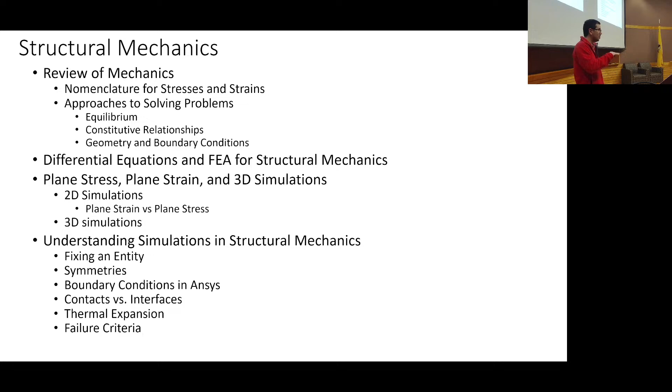We'll discuss some blasts from the past - mechanics, materials, plane stress, plane strain - and how we think about these simulations, or simulations of these types of setups. Then we'll get into some Ansys examples and do some of the same things we did in mechanics and materials using PrePoMax and CalculiX, doing them in Ansys. That will be a springboard to dive into the assignment, which includes the diving board. Okay, so here we go.

We really care about internal stresses, internal traction vectors, internal loads, and we can become like those engineers that think about invisible things. Usually in mechanical engineering, we have more affinity for tangible systems—they break, you get in trouble, it seems obvious in retrospect. But in reality, it's because we may have unanticipated circumstances, or a fault, or just didn't understand what's happening inside the object. So inside the object of our analysis, we end up looking at these internal forces keeping things in equilibrium that might be acting on small areas. These delta forces, these small forces over small areas, are what we call traction vectors.

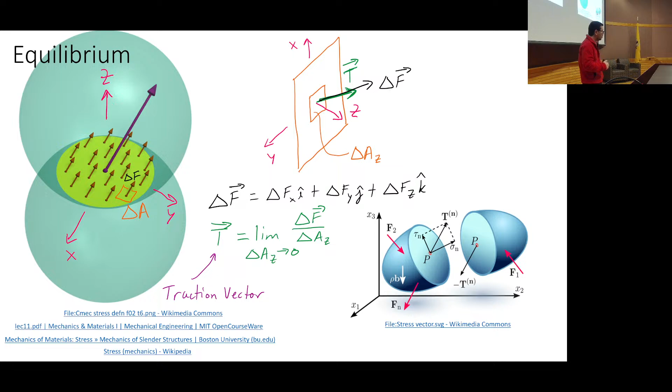And as we get into describing these traction vectors, we can think of the coefficients on the direction vectors for the traction vectors as our lovely stresses.

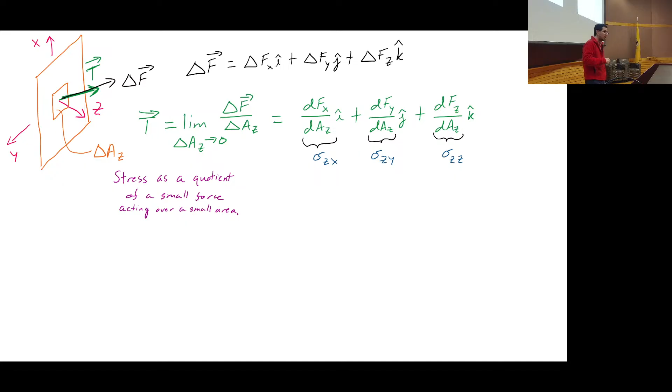So here you go. We define these stresses as being on a surface and in a direction. In this case, we were talking about a bunch of stresses on the z-face of this object—this plane is the z-plane—and we're looking at directions of stress in the x, y, z directions.

The convention, of course, we've already discussed because we've done some fluid mechanics, and in fluid mechanics often we're very concerned about what's happening with shear. We're also concerned about what happens hydrostatically with pressures, but shear becomes more the thing we're considering. In mechanics we do both—we're thinking about normal stresses and shear stresses, thinking about the effective stress, what is that material seeing, and then comparing these loads, these stresses, to failure criteria that we might pursue to understand whether or not something is going to fail.

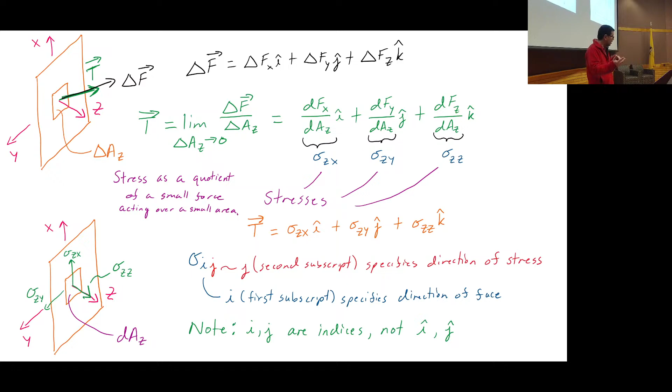Another aside: these stresses form a stress tensor. This is a 3D description of things. Do not say sigma ijk—that does not work, that does not make sense, because each one of these things is on a face given by an index in 3 directions, and then we have the second subscript, which gives us the direction the stress itself is acting in those 3 directions.

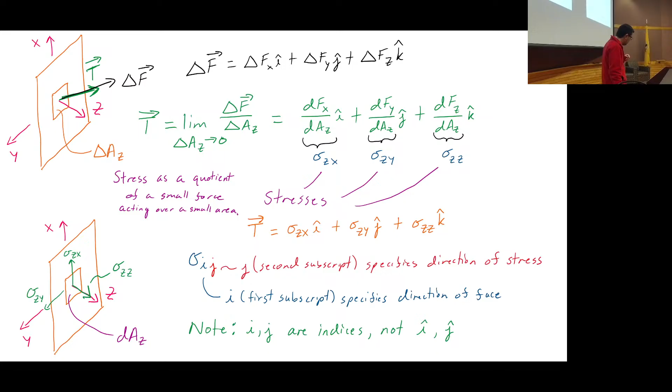Okay, so shear stress—we've talked about this before, and if we want to go back and do this more slowly, or just look at the slides which are available, you can get the idea that you have to satisfy equilibrium, otherwise these elements would start rotating or accelerating with angular acceleration. That would not be statics. And we also know that once you have one of these arrows of a shear stress drawn onto the element, then you can draw the other ones, because we satisfy both the moment and the force. Again, we're going through this quickly, it's just kind of review.

When you have 3D, you can make a nice little element, and this one only has the shear stresses depicted here. The normal stresses would be coming out of the faces of this cube.

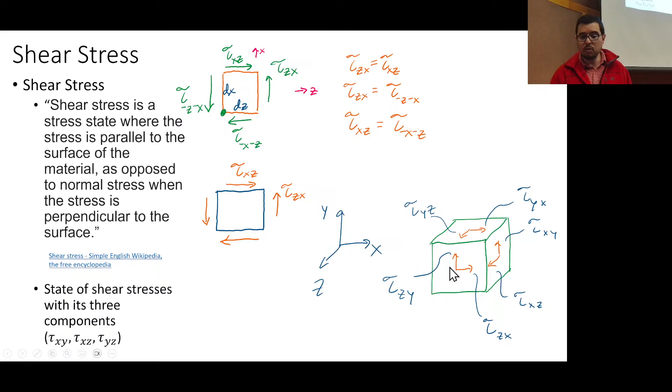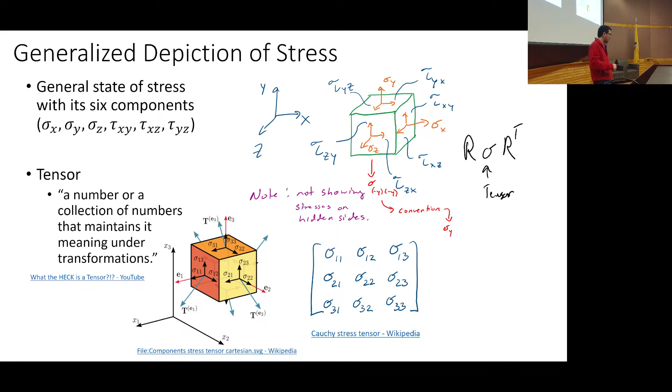We can also use tensors, and we can use the Cauchy nomenclature to describe them. You can also come up with ways of using rotation matrices to rotate these boxes in the state of stress about whichever coordinate direction we want, or combine them to have multiple rotations. Essentially, using rotations, you can describe the stress in a useful coordinate system, and figure out whether or not these would contribute to failure.

It's also, of course, the stresses do end up giving us an idea of how we can think of strains. So these strains then will extend—essentially integrate these strains and you'll be able to get the deflection or deformation of the object in question. Okay, so that's a very brief overview of things that we remember.

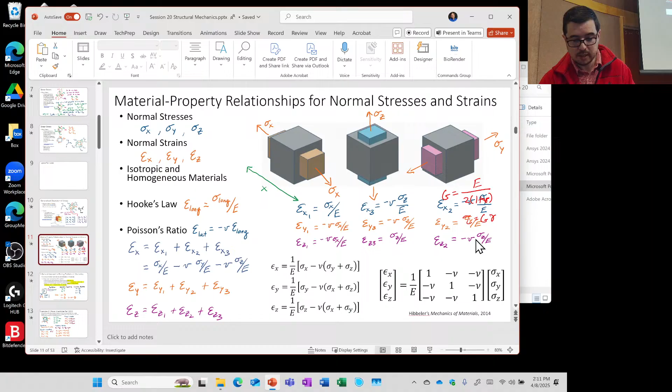I guess I have a couple things here that I can kind of—let's see, I don't know if I can subtract them or not. Let's see if we can. Yeah, why not, let's just get rid of these. Okay, and we'll go back to this. Okay, so what?

Now, question for you all: what are your favorite material properties for structure, for solids? What are your favorite material properties? Normal stress? Okay, that would be a quantity we are concerned about, all right.

My tendency is give me the normal stresses and I'm a happier person. But I'm asking about material properties. Elastic modulus? Okay, why do you like the elastic modulus? I feel like it's a pretty uncomplicated quantity—we got it, we lose it. Okay, all right, that's confidence. That's confidence, I like it.

Professor Singer has told his students you can think of many things as springs. I agree, you can think of many things as springs. The elastic modulus is a nice way to get an idea of what the stiffness would be, for the element at the element level, but also once you start building structures.

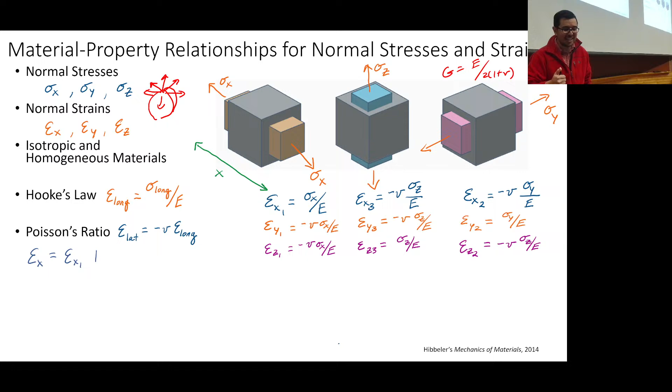The only thing I remember is ductile materials fail at 45 degrees. Ooh yes, in fact I'm with you. Okay, we're going to jump through this real quick. I'll come back to this.

Do you remember this? No? I got some no's, I don't remember this either. Normal stress, zero stress, normal. Zero stress, normal.

So then, if I take a perspective, in this case, if I use Mohr's circle, remember I have to draw the circle, and I can get tau max. Now this comes out, this is just Mohr's circle.

I jumped over the step where we did the slicing of the triangle. When we took an element, sliced it, and had the triangle, I forced you, if you were taking the class with me, to know how to do equilibrium on that triangle. If you did not do the equilibrium derivation on the exam, you didn't get full credit. Does anyone remember that? Okay, no. Good, I'm glad we haven't started.

So the point is that in the pressure vessel, just like what we were saying here, we have normal stress in this direction, but if you rotate the element 45 degrees, you can figure out what the shear stress components are. Because then the Mohr circle would tell us that maximum shear stress is going to be half of the normal stress that I've got.

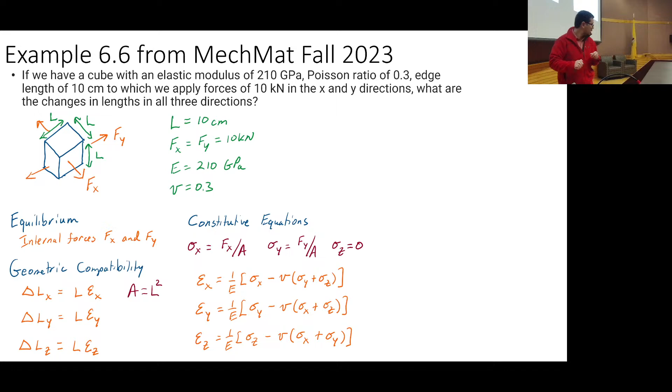We're going backwards, by the way. Okay, now, oops, now I'm going forwards. I should just use the keyboard. Okay, oh, now maybe you saw it, maybe you didn't.

Well, we're solving our problems in mechanics using statics. There were three pillars, three categories that we like draw two lines on a piece of paper, and there were three pillars. Do you remember what those three pillars are for solving a mechanics problem?

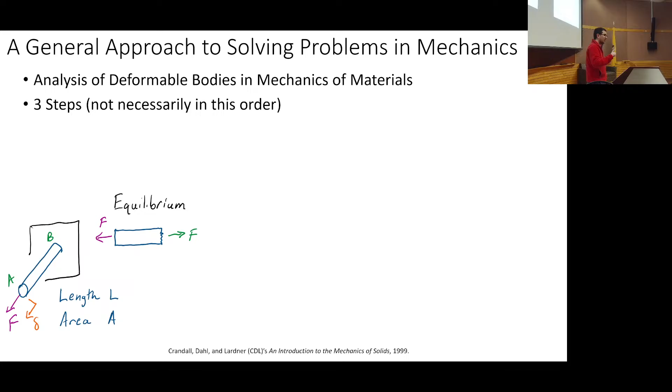One of them is there. It's written in letters already.

So equilibrium, right? We spent a whole semester doing statics. But what's the problem with only using statics to figure out stresses?

Yes, Rishi. So here everything is static, right? Like the moments? Moments, okay, momentum and moments are different. So yeah, you had to involve moments, but I'm going to say that the equilibrium that we're talking about...

Maybe I should change it, it's a study of forces and equilibrium requirements. Equilibrium does in fact include the moments. Okay.

So what else do we need in order to be able to calculate stresses and strains? Geometry. Yes. So we need a geometry, right?

So geometric compatibility. In particular, we need to know something about boundary conditions. And we sometimes need to say, okay, remember this displacement here is going to be equal to 0. This displacement is going to be equal not to 0. These displacements here and here, they're going to add up to equal to 0. Remember all of that? So that's all under geometric compatibility.

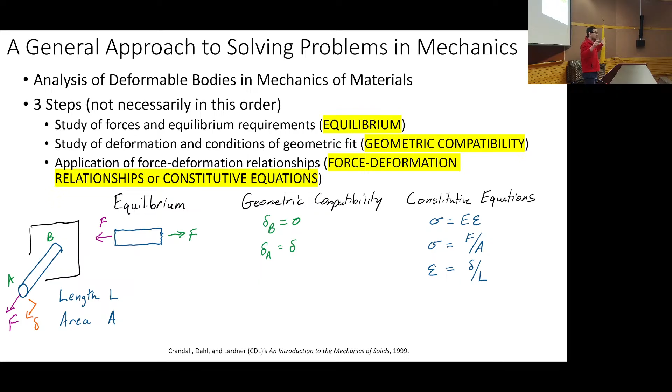But for those, especially for those indeterminate problems, right? Where it's like, hey, equilibrium only gives me a couple sets of equations, and I've got 3 unknowns. So how do I do it? I need additional equations. I need another equation. And so the constitutive equations and the geometric compatibility help us out.

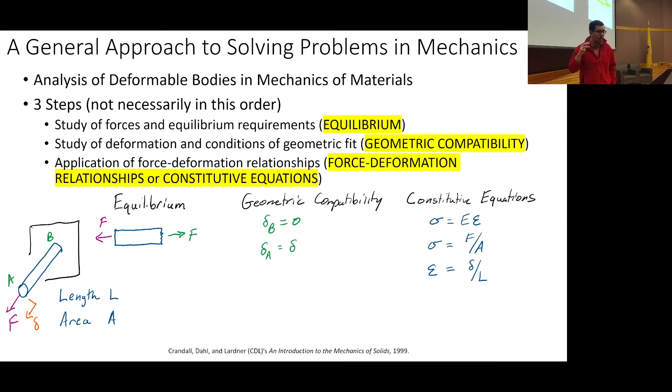Okay, so these are the 3 pillars: equilibrium, geometric compatibility, constitutive equations. If you look at the theory for, or some ways of describing the theory for finite element analysis, look at this. It's nasty. And again, this is an impressionist perspective. The 3 categories are equilibrium, geometric compatibility, and constitutive relationships.

So even when you, these are the differential equations, the PDEs that are being solved. But even when you set up your problem, now when you put it in simulation, you're kind of like, oh, I have to put some forces on this thing. Oh, that would be under equilibrium, or I put some moments, right? And I know that it's not going to deform, or I know it's not going to move.

All right, when I do this, or it can move. I mean, it's not going to accelerate. It's not going to, this thing has got to be fixed somewhere. We'll come back to that point in a little bit. I am going to be interested in what's happening with the geometry. Okay, that's great. I'm going to be putting boundary conditions. That's great, that's all geometry.

And then I'm going to be interested in calculating the strain and the stress. So then I've got my constitutive relationships. So we have kind of this idea that all these things are coupled together.

Now, are these equations as straightforward and simple as the heat equation? No. And that's maybe why you're like, well, why didn't we do this earlier?

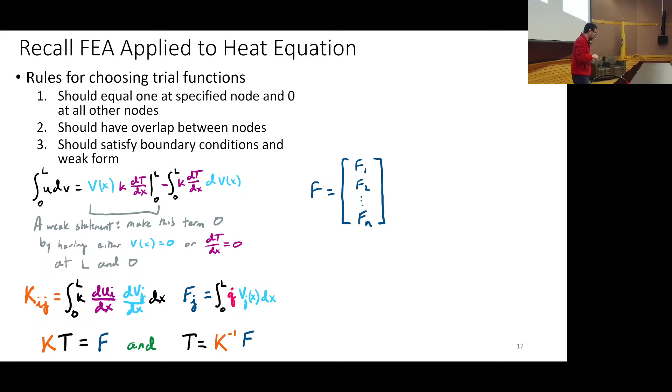And just like we described before, there are these test or trial functions, or basis functions, that we set up to gradually get us to the state of strain, the state of stress, and the state of deformation of this object.

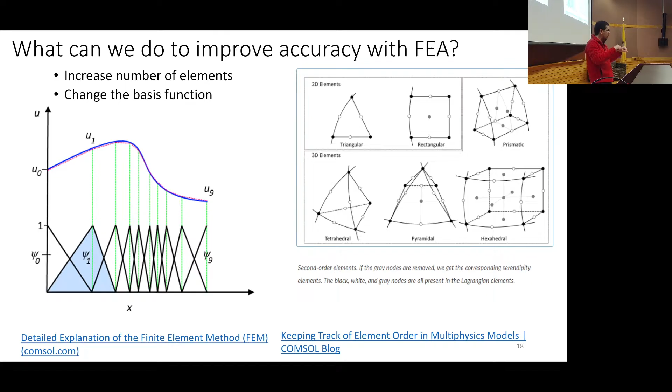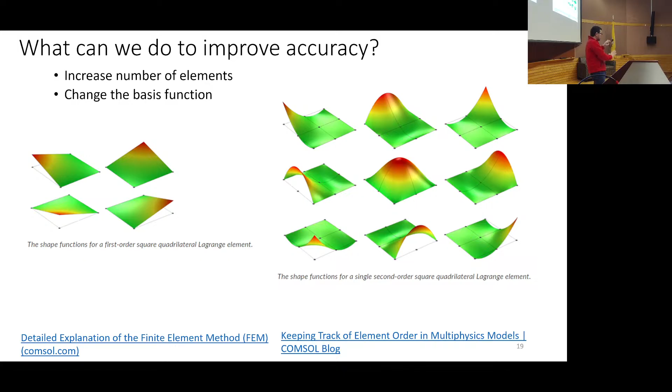And there are different types of elements that can be used. The more nodes you have, the more curvature an individual element could have. If it's just a triangle with 3 nodes on the corners, that element is going to be kind of planar, but its next door element can also be planar. So you can build this interesting shape, or set of shapes, with triangular elements. But you could add extra nodes to the sides of those triangles, and now you have these more interesting types of shapes, where there are nodes on multiple sides, so every element isn't just a linear gradient across it. Every element can have its own curvature and try to capture the detail more faithfully.

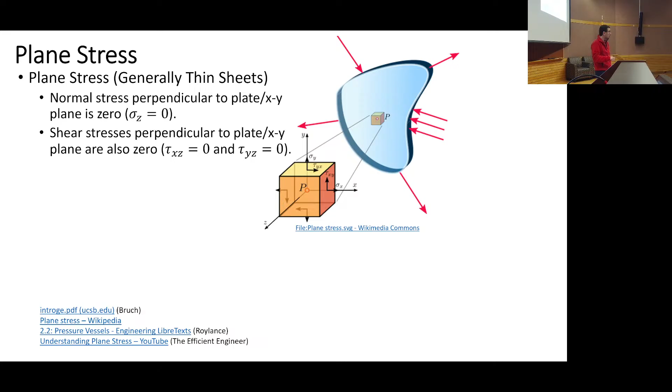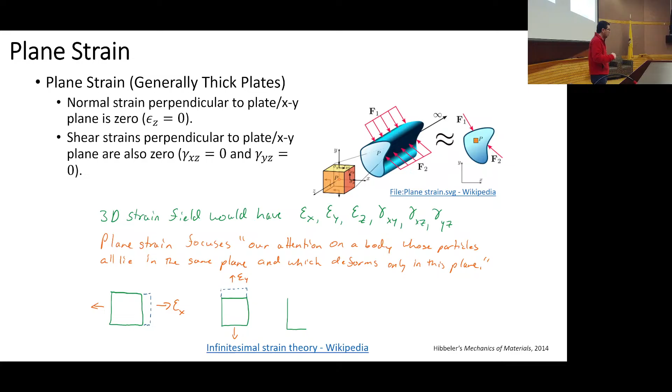Now, when we think about the objects we're going to simulate in finite element, we can think in terms of thin ones, which are states of what we would consider to be plane stress, or we can think of them in terms of thick ones, which is what we consider to be states of plane strain. And we can think of them in between as well. That's a very nice aspect of being able to do real geometry, a real 3D geometry: the world is not split into just very thick plates and very thin sheets, it's actually a combination of the two.

When we think about symmetries, we've discussed some symmetries in particle dynamics, in fluid, in heat. There's actually interesting symmetry in structural mechanics, which we don't use very often, but essentially, if I say this is a solid structure and I want to symmetrize it, you could say split it down the middle, and you can think of it as almost like having a frictionless boundary condition between the two as this slides up. This is something Professor Steve likes to emphasize, and I think it's a little abstract, but that's one additional way of applying symmetry to structural mechanics.

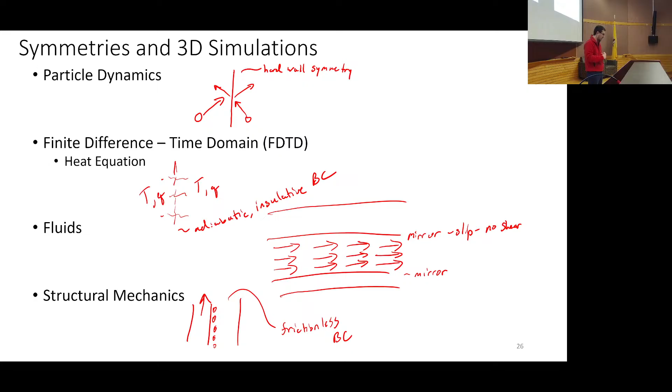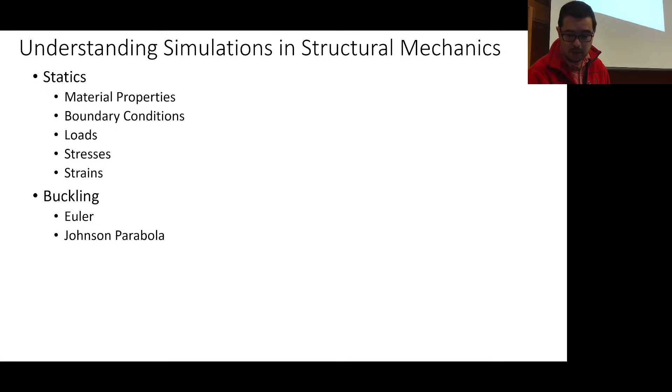Okay, so let's do some basic examples. We'll cover buckling next time, not today. Today we're going to focus more on static loading and also static thermal loading, and just show you how it's set up in Ansys.

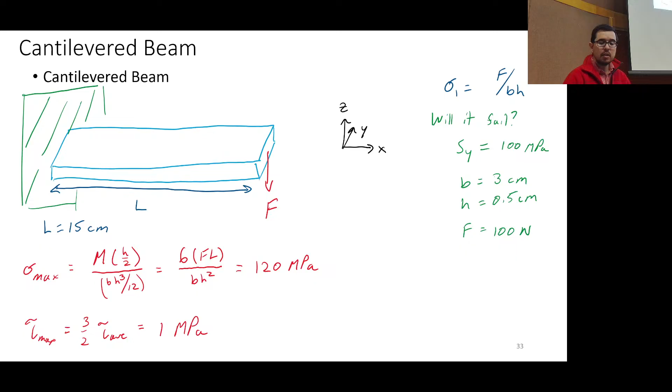So we're going to use, we talked about failure criterion already, a bar under tension, a cantilevered beam, and a bar under temperature, thermal expansion. This bar we're going to start with is kind of like a thin sheet. And while I'm talking, let's go ahead and bring up Workbench.

There we go, so it can load. We're going to have it have a thickness of just half a centimeter, so 5 millimeters, and a span across the top of 3 centimeters, and we're going to have it be 15 centimeters long.

We're going to apply a load normally, kind of pulling this thing apart, and be able to look at what the normal stresses are, and also the von Mises stresses, the equivalent stresses, and get some ideas and compare it to theory.

So to get started here, we're going to come down to static structural, and we put it in. And this time we can do a couple things. Let's start with the engineering data here.

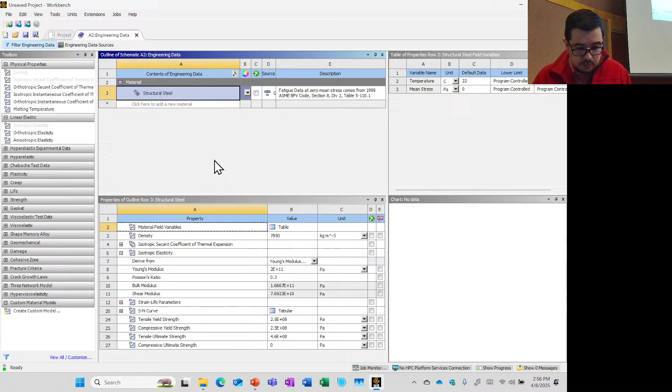So this is structural steel by default, but let's go ahead and call this generic steel as our material element. And you see as our material that we're going to be using, it's empty.

We talked about this a few minutes ago. What are some of the material properties, the basic material properties that we want to use to define our material for finite element? What kind of quantities, what kind of material properties should we drag in there?

Yeah, so elastic modulus would be a good one, right? So we can come over here to isotropic elasticity, and we can drag it over to this property thing, and boom. All right, now we called it steel.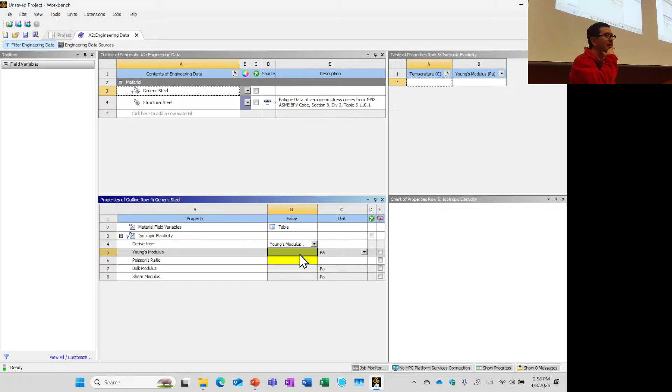So what do you want to put in for the elastic modulus? Anyone? Elastic modulus of steel? Sure, we can put in 210 if you want. 200, 210, sounds good. Your GPA depends on knowing this. All right, so 210 gigapascals.

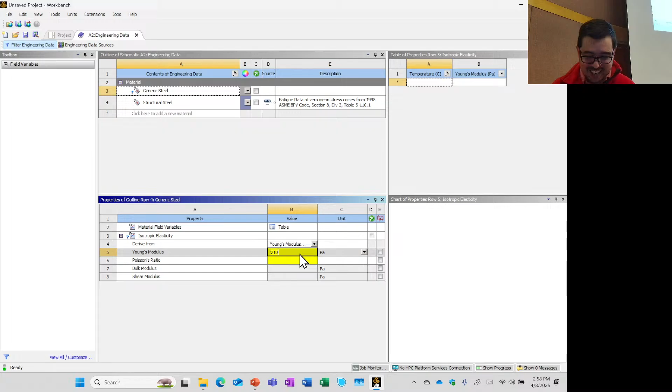So that's E to the 9. And Poisson's ratio, 0.3 is not bad. And it's already done some other calculations for us.

Here we can also put in a density, although we don't care that much, but the density for steel is... anyone? What's the density of steel?

No idea? Okay, what's the density of water? 1,000. Okay, is steel more dense or less dense than water? Good, all right, so now we have a lower limit, 1,000 being kilograms per meter cubed.

7,000, that's a good guess. I think the internet just told you the answer, right? So 7,850 kilograms per meter cubed.

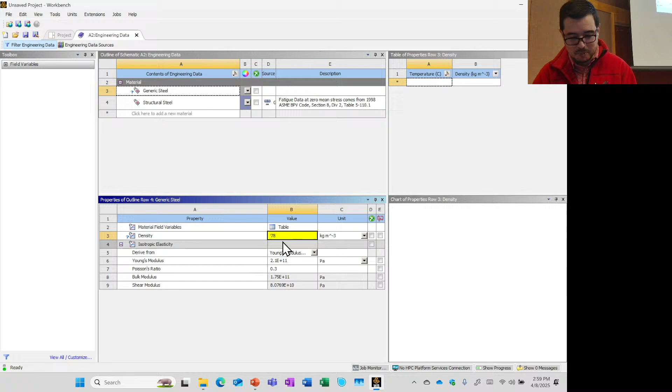Now, is aluminum less dense or more dense? How much? You don't know, that's okay, right? Well, is it okay? So aluminum is around 2,700 kilograms per meter cubed.

What are some of the most dense solids? What are their densities like? Lead, okay, so lead is pretty dense. That's going to be probably around 10,000 kilograms per meter cubed. Tungsten's also more dense, that's probably close to 18,000... 19,000.

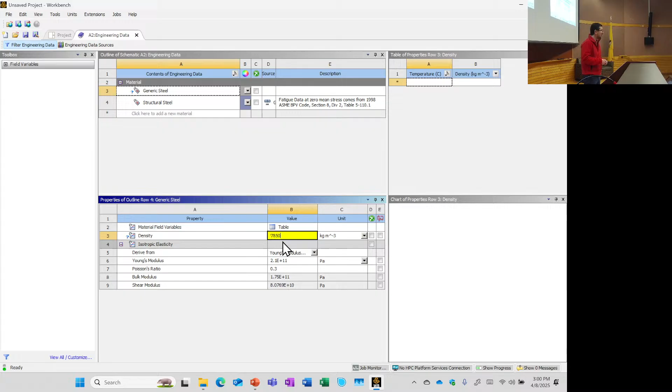Gold? You know, gold is like around 19 or 20,000 kilograms per meter cubed. Platinum, also pretty dense. Gold is a popular commodity right now if anyone's looking at what's going on in the world. But anyway, so yeah, those are just some general ideas. Plutonium, also pretty dense.

But yeah, we have our elastic moduli, and even though we don't think about density too much, it's pretty good to have an idea.

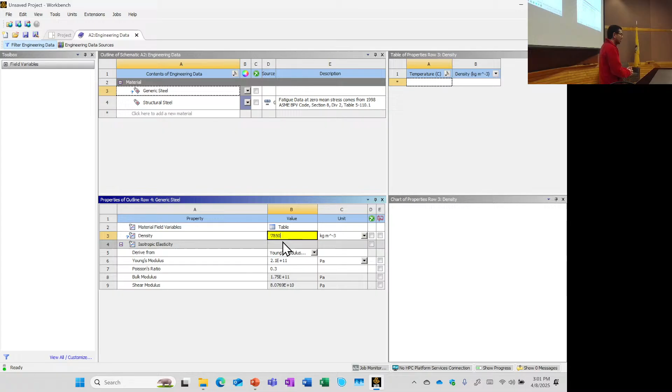I asked the other class this same question. If you go into the machine shop, actually you don't have to go into the machine shop, if someone hands you a sheet of metal and says, is this aluminum or steel, can you tell the difference just by holding it?

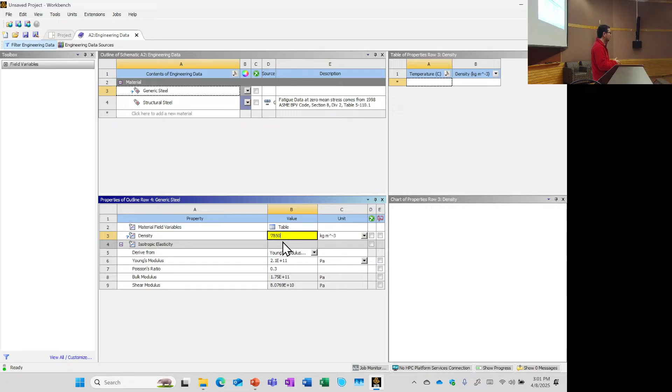You can. How can you tell the difference? Aluminum feels a little lighter. Yeah, it feels a whole lot lighter, right? And it's not because you took it and hit your head with it, although that's another way you can probably figure out which one is which too, if they're the same thickness, because the elastic modulus is going to be a third in the aluminum case of the steel. Anyway, okay, so we've got material properties.

Since we're going to do a thermal problem as well, let me see, where is it? We can also put in this... yeah, this is fine. We're going to put in the thermal expansion, okay.

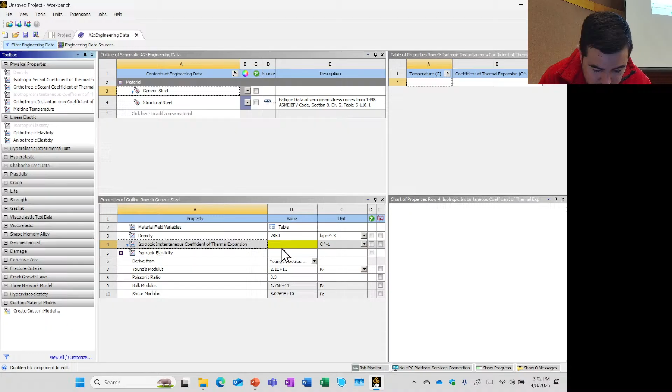And that's usually like 10 to the minus 6 or so, 10 times 10 to the minus 6, okay, or 12 times 10 to the minus 6. We're going to use 6 just because that's what I did before, so 6 times 10 to the minus 6. And of course, if I wanted the volumetric coefficient of thermal expansion, what is it going to be if it's 6 times 10 to the minus 6?

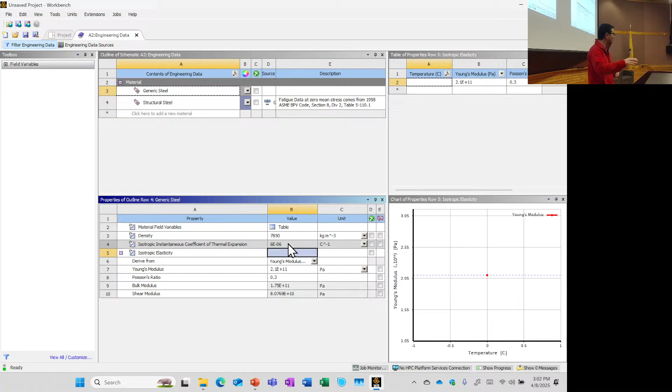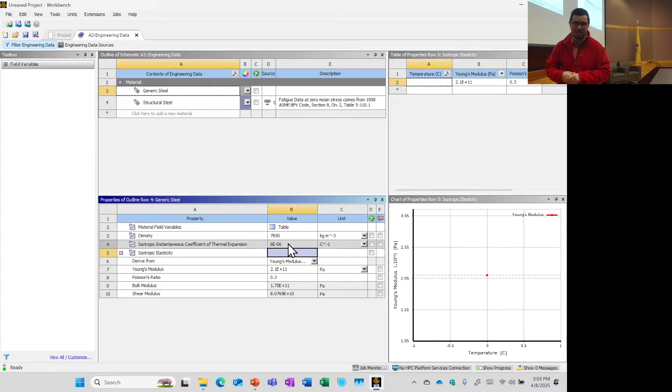Oh, here's a hint. Yes, right, factor of 3. Don't cube it, just multiply by 3. You can go ahead and look back at your mechanics of materials notes to figure that out.

So I think we've got our material properties set. Let's go ahead, we get to leave it in 3D. We're going to right click and do new SpaceClaim geometry, and we'll wait.

Did anyone have fun with Design Modeler? Takes more RAM, doesn't it? A little bit slower. I tried to get the airfoil thing to work in SpaceClaim, but I could not, I failed. So instead I followed what other people did in Design Modeler. But if you all have success with SpaceClaim and importing your airfoil geometries, feel free to post a video and I will like it for you. Maybe someone already has, right?

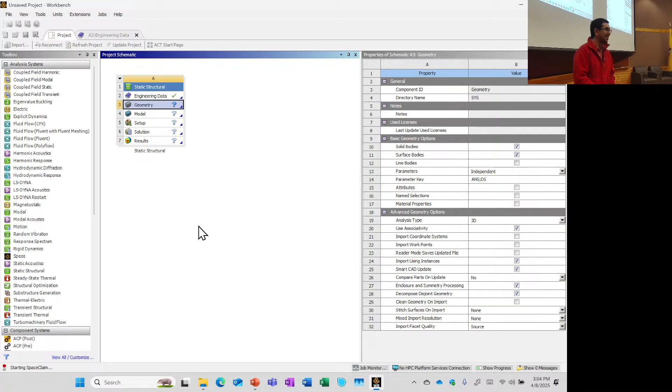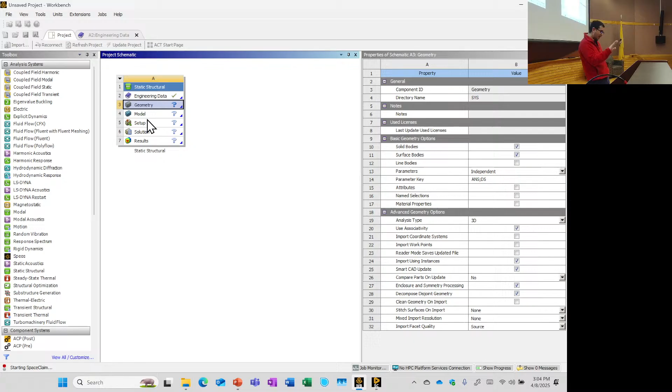Okay, so we're waiting for SpaceClaim to start up. What's nice in the static structural model, or this module, is that in the next step when we do the modeling, the results will appear in the same window. It's not like Fluent, well Fluent does that too. The results that we're interested in will appear in the same sub-software window that we do the meshing in, so we'll be able to do meshing and get the results at the same time.

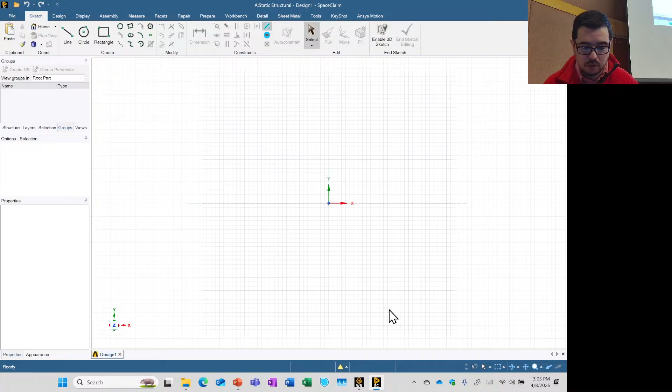Okay, so here we are waiting. All right, and we can go ahead and do the top-down view. In this case, if you want, you can change the units we're interested in using. So you could come over here to units, and we're in millimeters for now. That will be suitable for the geometry, because it's not crazy: 15 centimeters, so that's 150 millimeters this way, and 3 centimeters this way, or 30 millimeters, and then it's got a thickness of 5 millimeters.

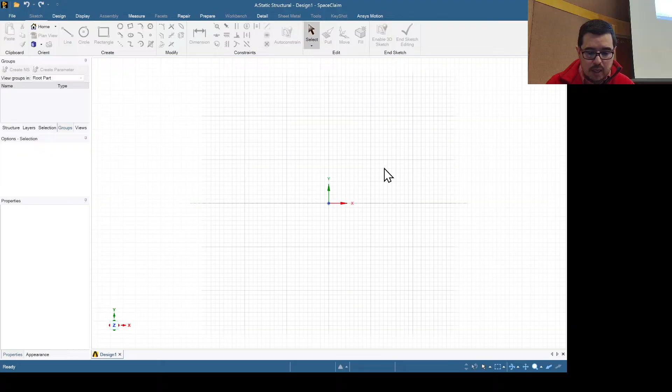We're going to draw the top-down perspective and then pull this surface up. So we'll just put a rectangle in, and we'll click here. Oh, did I not click this? Maybe I had to click this first, and then now I do the rectangle. Okay, and what did we say? We said it's going to be 150, so 150, then tab, and it's going to be 30. And I hit enter. Okay, and now we have this geometry.

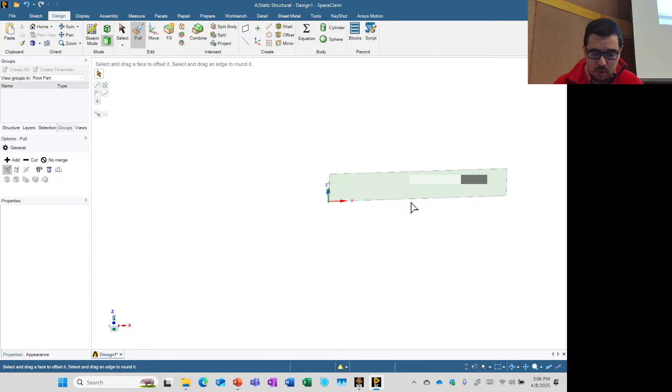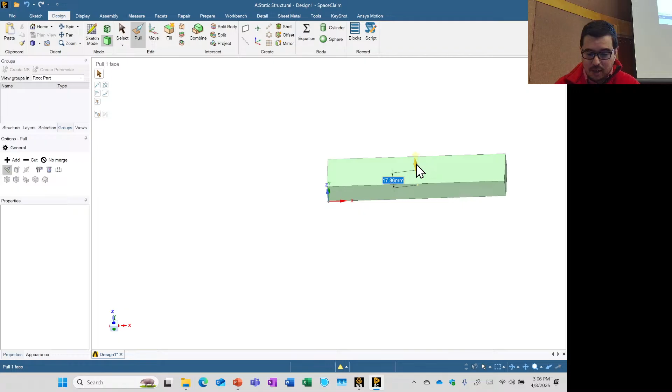This is one of those nice opportunities where you do hit end sketch. Sometimes you just close the SpaceClaim, I know it's confusing. Okay, and then I can pull this up a little bit. I click on the pull, it's already selected, but I'm going to do a pull. I see this arrow here, I hold my left button down, and it comes up with this thingy. While my left click is still engaged, I type in 5. Hit enter, now it's 5 millimeters. Hold, yeah, you got it.

All right, so now I've got my structure, that is what I want. I just close, don't do anything else, and we come back into the workbench, and we can go ahead and start the modeling. And the modeling will be two things, right? We're going to do the meshing, and we're going to do the describing of boundary conditions.

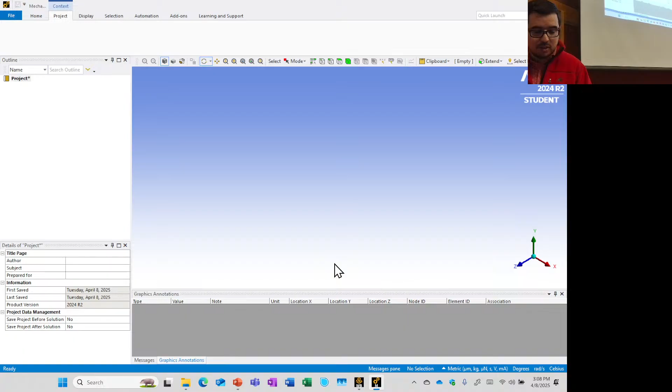Now, when we have this type of picture, it looks really nice, you know, you have these forces on either side, and it's just magically in space. One of the things we want to take away from today, take my word for it: when you're doing static structural analysis, this is not using the explicit dynamics that Ansys has for you. When you do these static problems, you want to make sure you have something anchored to the ground. You can't just put one force here and the exact same force here and have it solve for you. It will not do that. It needs to have something anchored. Even though it's balanced in terms of force, any little thing off and it's just not going to solve. It'll tell you it will not solve.

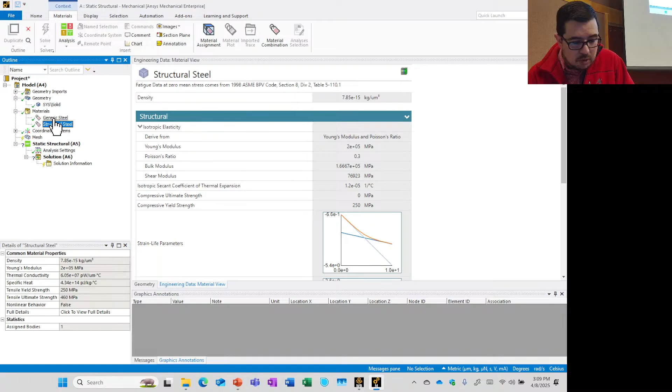Okay, so we come over here and we see that we have a geometry, and we have this solid. Okay, that's good. We have this material, and we see, oh, there's still structural steel, I think I made a boo-boo. Because what I really want to do is assign my generic steel.

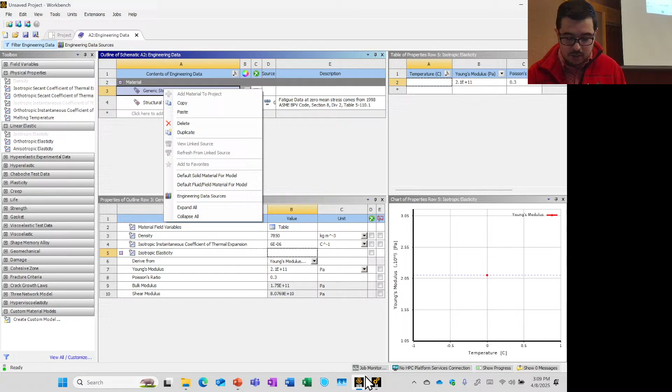Okay, so when I look at this, I can come over here and say, no, I didn't really want that. I was just kidding, I actually want generic steel. So make sure you change that - not that I've ever made that mistake. If you go back to the workbench, what I should have done is right-clicked and used this steel, my generic steel, as the default solid material. But I didn't do that, I forgot. So anyway, making the correction there.

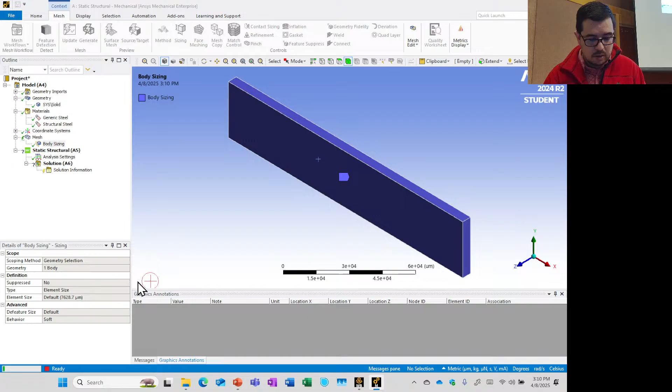For the mesh, we'll go ahead and insert sizing, and we'll do a geometry. Let's select the whole body. Then we're going to change the element size - if I do 5 millimeters and generate, and then come back and click on mesh.

That's a really nice regular mesh, but it's probably not the greatest for describing what's happening. Remember, my beam is 5 millimeters thick, so it's just one element thick.

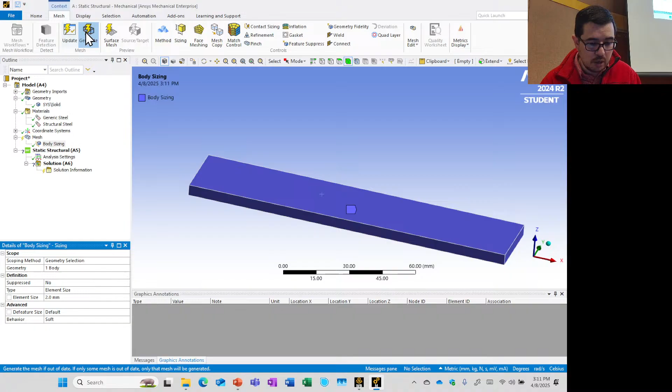So I can come back here, let's do something a little different, and we'll put in 2 millimeters instead of 5. Whoa, that's microns - no, 2 millimeters. So let's change this, we're going to set ourselves to be looking at millimeters. Okay, so now let's do 2 millimeters like that, and let's go ahead and generate, and then we'll click on the mesh again.

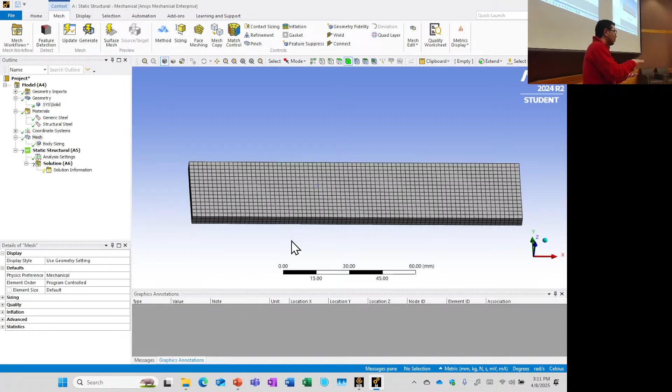That's a pretty good mesh. There's a little bit of art to it, and I'm not showing convergence in this case. But if you wanted to show convergence, you would nicely say, oh, here was one - this is when I had 100 elements, when I used this mesh size. This is when I had 1,000 elements, and you show that the values stop changing, whatever value would be of interest, maybe a stress.

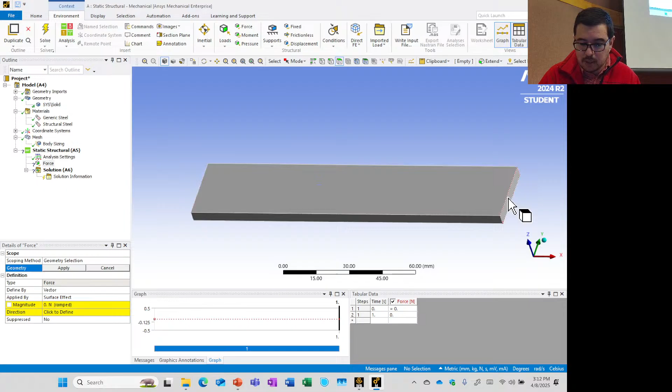Okay, so now what do we need to do? Well, we need to add some boundary conditions. So maybe the first thing to do is add a force to the right surface. This is a force, and it's for a face. I'm going to select that face right there, and then I'm going to break it into components. You could use it as it was, but we're going to break it into components. Now it says there's no selection selected, so now I've selected it, and we're going to do it in the X direction.

In the problem at hand, we're applying 10,000 newtons - that's a lot of force. Foreshadowing: if this were a buckling problem and I applied it in compression, I would have some other issues, because this looks kind of thin, flimsy. But here I'm just going to put 10,000 newtons in the X direction, just like that.

Now, what we said before is that we can't just put another force on this side. So for now, what we're going to do - because it seems mathematically, or in equilibrium, like it should be balanced, but in mechanics that's not giving this a solid base - is use a fixed support on this side, just like that, and we apply it, and we should be good.

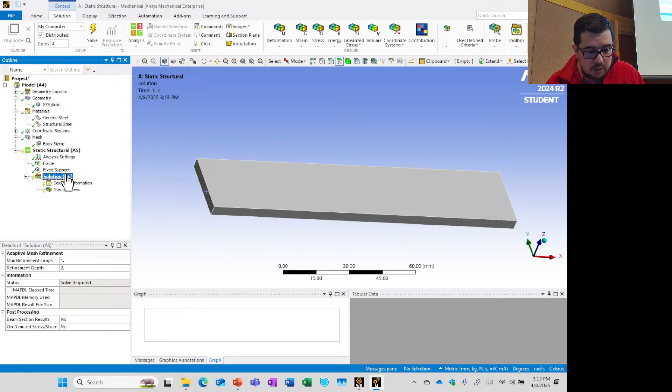But my solution doesn't have any interesting results, so we're going to introduce some things like the normal stress - this problem is going to be a good one for normal stress. Let's look at the strain, the normal strain. Since it's steel, there's a good chance it's ductile, so let's look at the equivalent von Mises stress. Let's also look at the deformation - the total deformation. And let's go ahead and run this thing, so now we hit solve.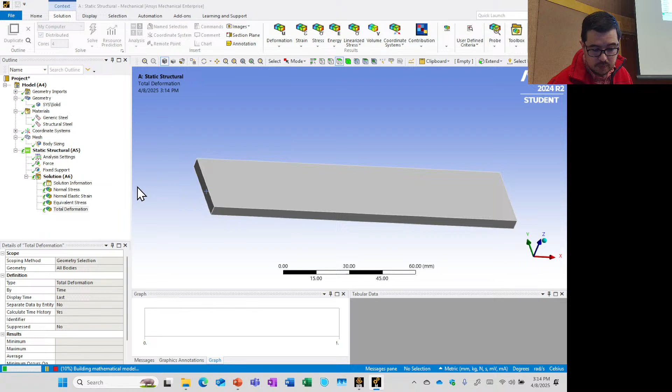And it's thinking. What do you expect? So, what do we expect to have? If we did this right, force divided by the span times the thickness, that's the B and the H, we expect that it will tell us that we have a stress of 67 megapascals. That's a normal stress. Okay, let's see what happens.

Okay, well this is the deformation. So the deformation, what's going on? Why is it not all 67 mega? Well, it's because deformation is progressing. As it moves along, it gets larger and larger. And that's what I've selected here.

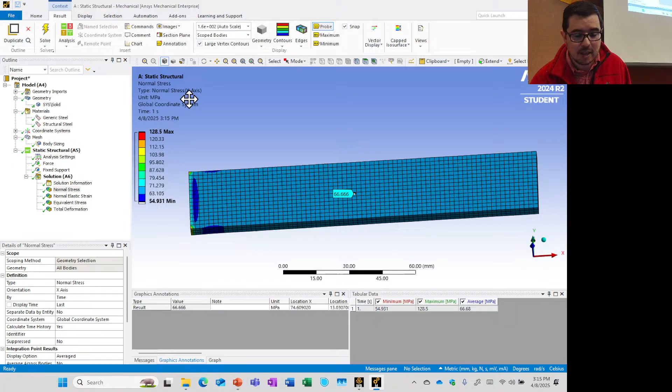Let's look at the normal stress. Okay, and now the normal stress, if I hit a probe up here and I click, oh yeah, 66.7. And what are these units? Megapascals. That's good. What's going on here though? Look at this, 77. But it's not happening over here. Remember the force is on this side? What is going on over here? Why is this not all nice and perfect on the left side?

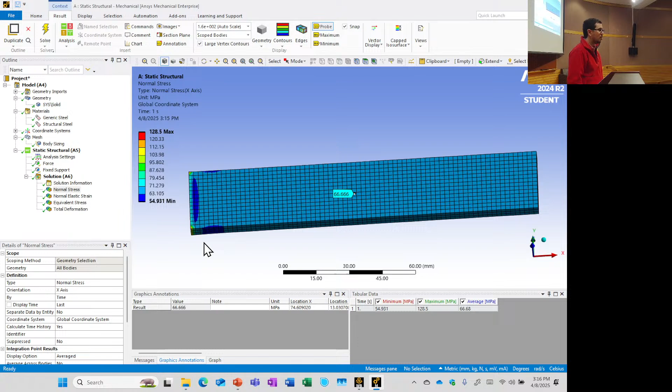That's the fixed end, right? It's a fixed end, yes. So what's happening? Support reactions. And remember, this material has a Poisson's ratio, right? So when I pull in this direction, on the right, this is actually extending, deformation this way. But it's also contracting in those two directions. This fixed side does not allow it to contract in those two directions. And so you have this pattern, well, it's not abnormal, it's just the pattern that you get when you have this fixed end.

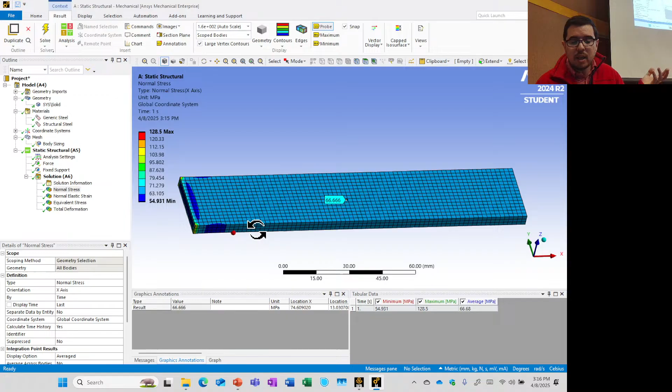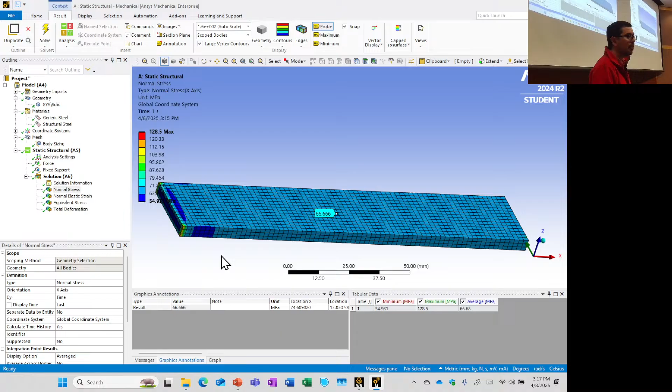So if I want to make it look very like a textbook, what can I do? I want to see 100% uniform stress across this entire structure. What do I do to do that? How do I do that? Any ideas? Well, what's causing the problem? What's causing the problem is I have completely fixed, right? So maybe I don't want completely fixed, because if I have completely fixed, then when it tries to contract in those two directions, it can't do that.

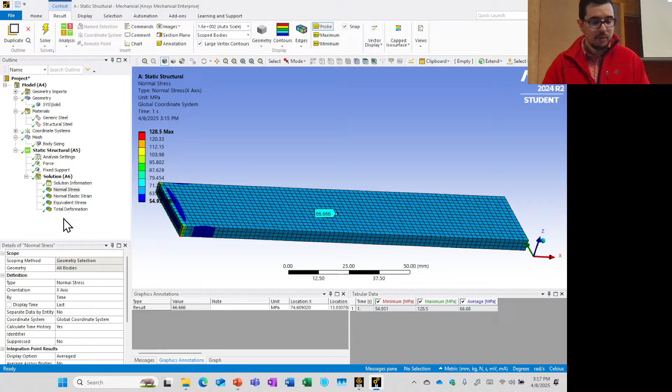So what do we do? Well, first, let's just go ahead and suppress that. Okay, now we said that we needed to have something fixed. Let's just pick a point that we can fix. So we're going to do a fixed support, and in this case we're just going to come over here and do a vertex. I select that, I hit apply. Now, is that enough?

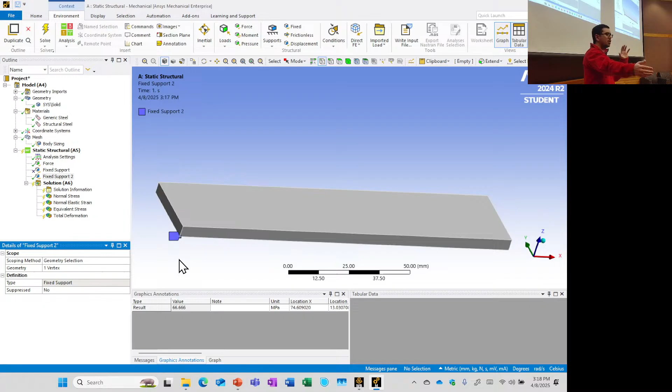No. What else should we probably do? What do we really want to constrain? What do we need to make sure does not go anywhere? Or which direction do we not want it to go? We're running out of time, so without pestering you too much, we want to make sure that the displacement in the x direction is fixed, but the displacements in the orthogonal directions is free to just contract as we like.

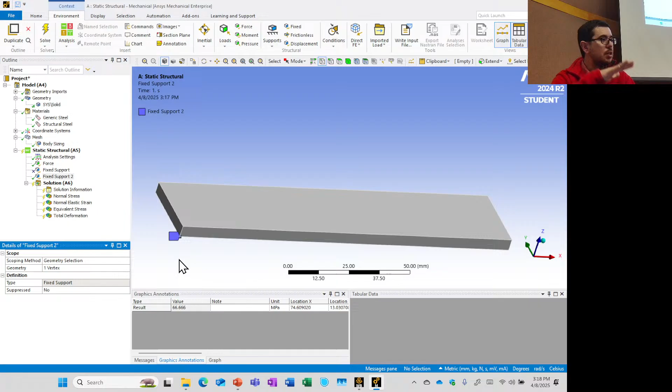So what we do is we add a displacement constraint. See this? We click on this, oh actually I guess I need this face. We click on this face, apply it, and you see it says x component free, y component, z component free. So it's doing nothing until we say it's 0. We're not going to allow it to move in the x direction, but we will allow that surface to contract or expand, whatever it wants to do in the y and z directions. So now we go ahead and click solve.

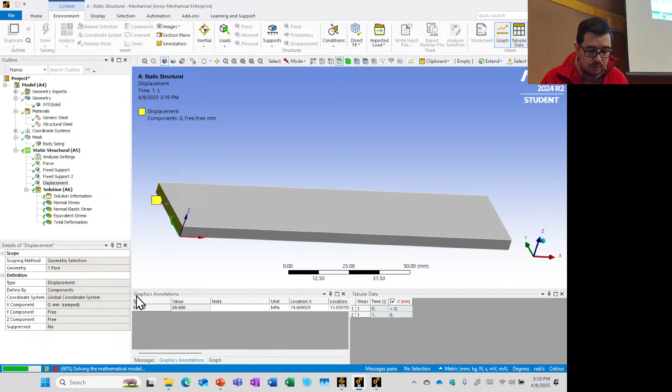Oh no, so I did something not so good, I guess. Force is still there. Fixed support. One vertex. Displacement. That face. This force. Well, this is embarrassing. 0. Let me suppress. I'm going to do, instead I'm going to use, actually I'm going to do, no that shouldn't do it. It should have just worked.

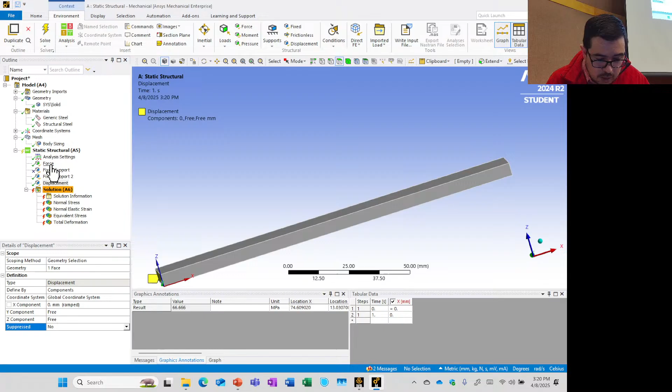See, this is where it should be 0. Wait, suppressed? Why is this suppressed? No. Displacement, okay, that geometry, this face, this vertex. Suppress, no, okay well this should have worked and I'm not sure why it's not working. Fixed. No, now I've got too many. These are suppressed. Where did I put it? Where did I put it? Did I put it? Yeah, that's a fine spot to put it.

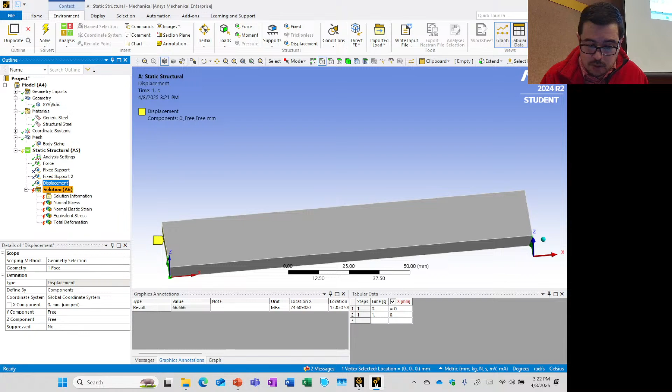Okay, well I'm having a brain freeze. Okay, but that should, and if you look at the previous video, you can get it to be completely uniform, okay. Well, we're out of time, and that's a downer of a note to end on. We'll come back to it. Let me just save this. Well, I'll save in a second.